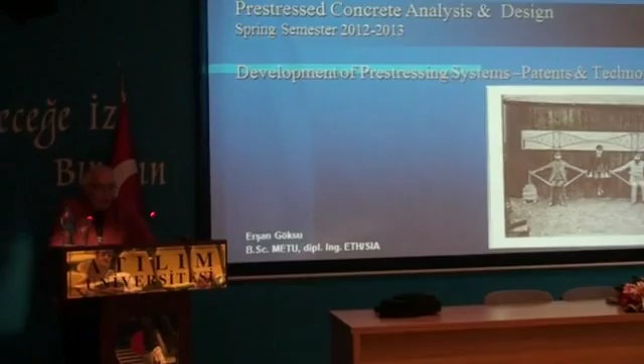The name of the seminar or colloquium is Prestressed Concrete Analysis and Design, and I'm going to specially deepen into the development of prestressing system, patents and technology. That's an introductory discussion on the development of prestressing system patents and respective technology. This presentation is proposed for at least senior year students at the Department of Civil Engineering of Atılım University, as well as for master's students. This colloquium aims to give a brief idea of prestressing technology, materials used, and necessary devices and equipment with their design and development, as I told you before. Presentation of this technology, marketing of this technology to the engineering market, is another aspect - how we are going to sell it. We produce something, but we have to sell it.

I started my course with Ararat Mount in Turkey, in Eastern Anatolia. As a young engineer, an old engineer told me there are no very difficult problems - all problems could be solved just by climbing a mountain step by step. That's a small mountain, not one of the highest in Europe like the Matterhorn. We are going to climb to the top of the Matterhorn, or to the Ararat, and after a while we shall see what's going on.

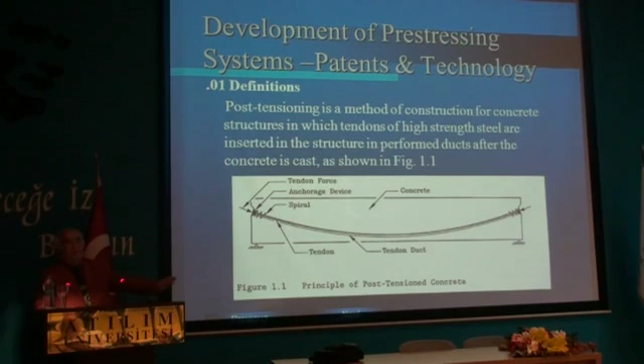In concrete courses or prestressed concrete courses, you already know all these things about it. I'm not going to tell too much - I suppose that you are aware of this technology.

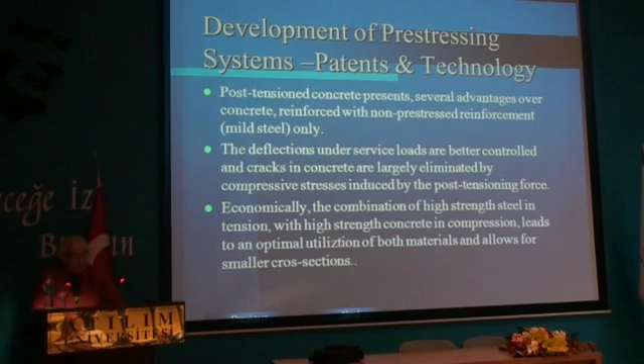Post-tension concrete presents several advantages over concrete reinforced with non-prestressed reinforcement, mild steel only. Deflections under service loads are better controlled, and cracks in concrete are largely eliminated by compressive stress induced by the post-tensioning force. Economically, the combination of high-strength steel in tension with high-strength concrete in compression leads to an optimal utilization of both materials and allows for smaller cross-sections.

As I told you, in order to climb a mountain, in order to develop our technology, our devices, our anchor plate, we are going to start very slowly, step by step, to climb the mountain.

I'm going to tell a very short history of the post-tensioning system. Post-tension concrete is based on the principles developed in the late 1920s and early 1930s by the French engineer Eugène Freysinet for prestressed or pre-tension concrete.

Post-tension concrete was first used in the late 1930s for the construction of bridges in Europe. Eugène Freysinet built the first large prestressed bridge in South America, the Galion Bridge near Rio de Janeiro. Precast beams of 37.5 meters in length were installed in the 14 spans of this structure. Certainly a 37.5 meter span, and precast pretension beams today are still our everyday project.

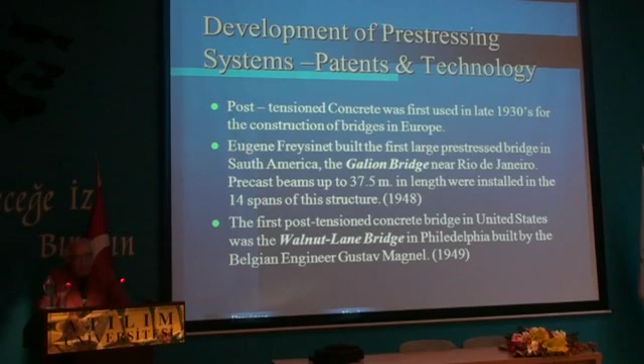The first post-tension concrete bridge in the United States was the Walnut Lane Bridge in Philadelphia, built by the Belgian engineer Gustav Magnel.

In order to solve the problems, we are supposed to go sometimes through glacier difficulties. We have to see the joints in the glacier, and we are supposed to spring above the glacier, and we are supposed to go our way firmly and slowly.

In earlier times we had stones. The Romans developed arch bridges and arch structures utilizing this construction material. We also use bricks - after the Romans, especially the Byzantines, were the founders of the utilization of bricks. If you go to a historical site and see stones, you can immediately tell that's a Roman or Greek structure. If you start to see bricks, you can tell that's somewhat Byzantine.

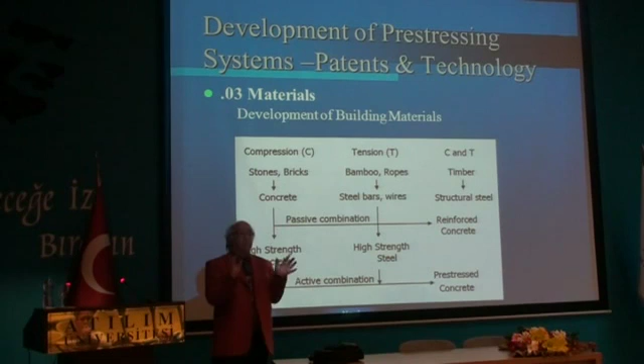Then, on the other side, for the tensional structural members, we were using bamboos - they were using them. We still have some experience with bamboo as a tensional part. They use ropes, then steel bars, surely in classical reinforced concrete systems, and wires - especially wires, the pre-stressing wires.

If we combine concrete and some bamboo or steel bars, that will be a passive combination - after the structure has developed, they are not active. How can they become active? We utilize high-strength concrete with high-strength steel. That gives us an active combination of both members, so-called pre-stressing.

Through passive combination, as I told you before, we have reinforced concrete, and by active combination of concrete and steel, we achieve prestressed concrete.

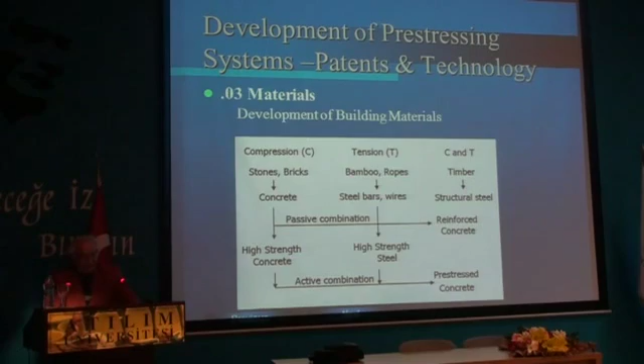Now, I'm going to take the material, especially concrete, and tell you some words about concrete. The universal rule of reinforced concrete is valid as well for prestressed concrete. High tensile strength steel should be utilized with concrete with high compressive strength. The necessity of high compressive strength in concrete in prestressed concrete technology is apparent.

It means the compressive stresses behind the anchor plates, especially its domain of work, determines the compressive strength of the concrete. The loss due to creep and shrinkage is another reason for utilizing concrete with high compressive strength.

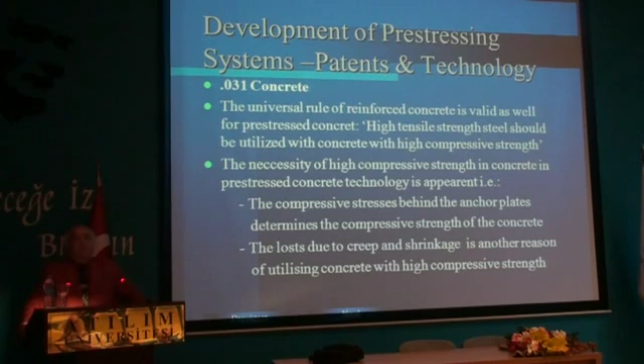The development of prestressing concrete in the early 19th, 20th centuries was very, very slow because of the material qualities. We didn't achieve high quality tendons, high quality steels. We couldn't achieve high quality concrete.

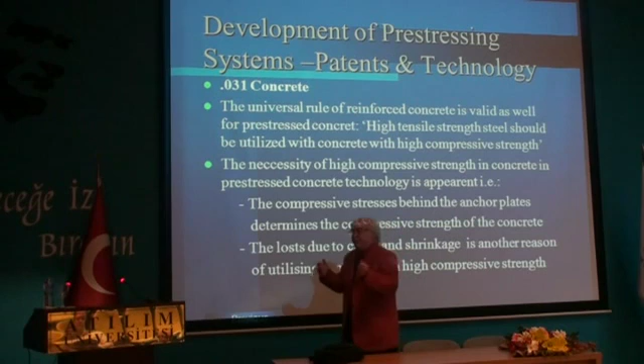What happens after making prestressing, because of the low quality steel and low quality concrete, we had some losses. These losses were preventing us from using prestressed concrete as a structural material. After mechanical and metallurgical engineers developed high tensile steels, we were able to build prestressed concrete, so that we could use prestressed concrete in all structural parts.

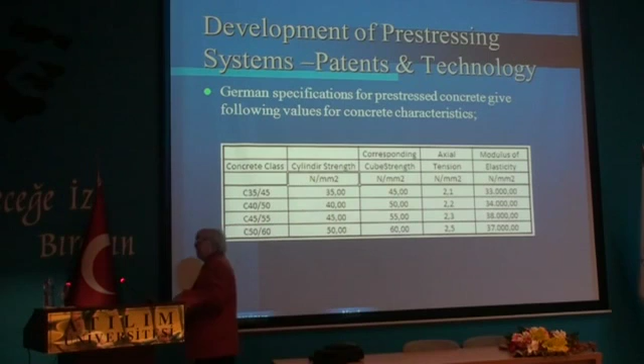The German specification for prestressed concrete gives the following values for concrete characteristics. You could find these tables all over the world. At least I would like to say that concrete has to have good quality because of shrinkage and creep, because of the losses, and prestressed wires or tendons should have as well a high strength.

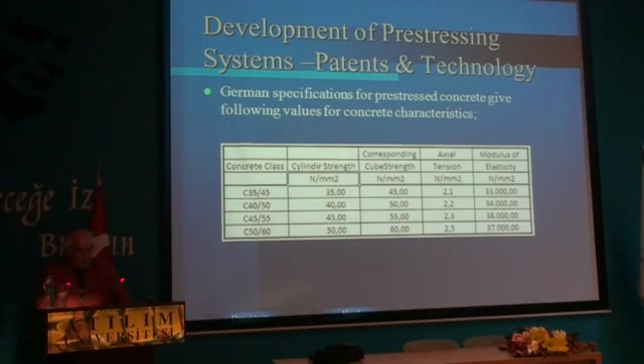It is very difficult to manufacture a prestressed concrete structure with concrete strength quality of 250 kilograms per square centimeter, or 25 Newton per square millimeter. It is not possible. We are going to use concrete of compressive strength of 35 Newton per square millimeter minimum.

Prestressing steel: the ultimate strength of steel wires, strands or bars varies with their manufacturer, so it's frequently necessary to obtain sample tests for each lot of product. However, the general range of values is listed in the table below.

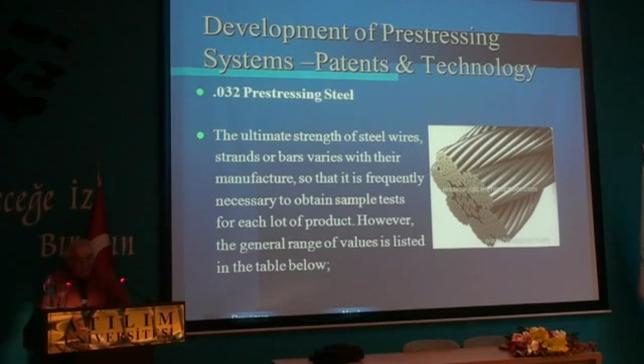That's a very important paragraph. Prestressing tendons or bars, it seems it is not difficult to produce, but to produce a homogeneous and good quality bar is not always possible.

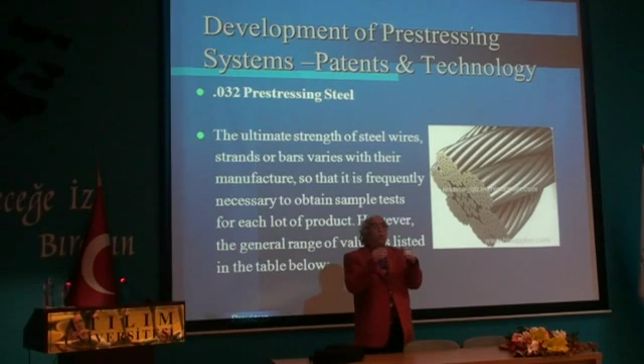That's why these bars should be tested, each bar should be tested, and they have to be certified by the Fédération Internationale de la Précontrainte, FIP, so that you could use the prestressing bars in your structures. If one of the bars has a defect at some small point, then it cracks and disturbs all the prestressing technology, all the prestressing calculations, and so on.

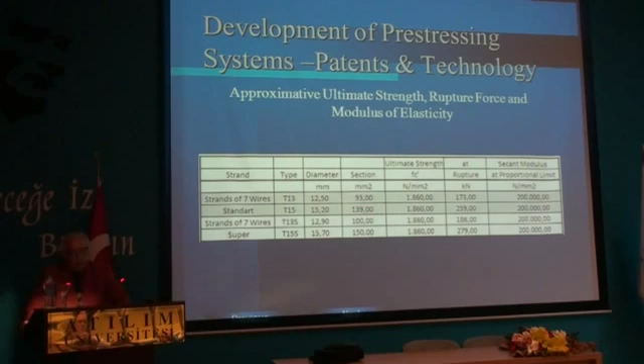Now, in this table, I'm going to give two tables: strands of 7 wires, standard wires, and strands of 7 wires super bars, which have an ultimate strength of about 1,860 Newton per square millimeter. This table you can find anywhere in booklets or on the internet.

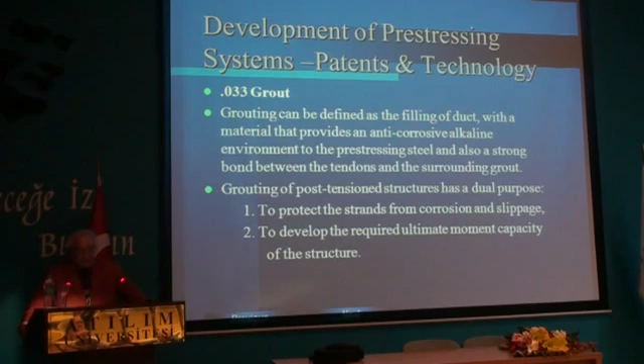Grouting can be defined as the filling of duct with a material that provides an anti-corrosive alkaline environment to the pre-stressing steel, and also a strong bond between the tendons and the surrounding grout. Grouting of post-tension structures has double purposes: to protect the strand from corrosion and slippage, and to develop the required ultimate moment capacity of the structure.

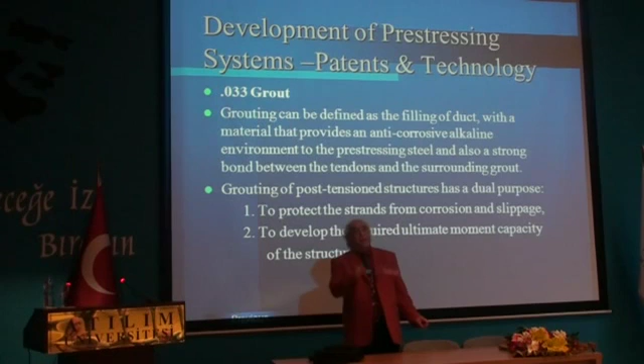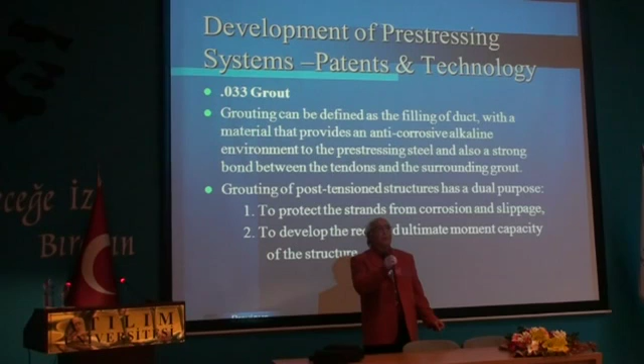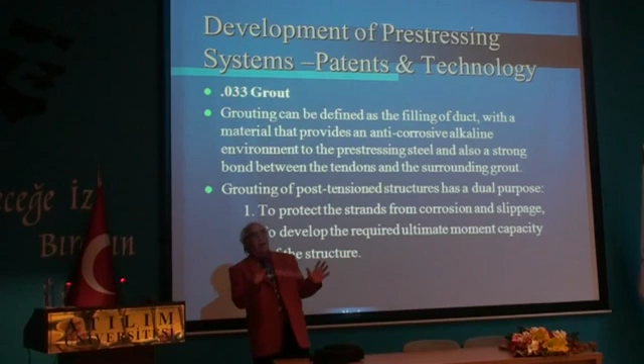Certainly, corrosion is one of the very important phenomena, not only in pre-stressed concrete, but also in reinforced concrete. We have the cover in order to keep the bars in reinforced concrete from corrosion. Corrosion is one of the biggest dangers of reinforced concrete, as we know. We have the same problem in pre-stressed concrete - we have to keep the bars without corrosion.

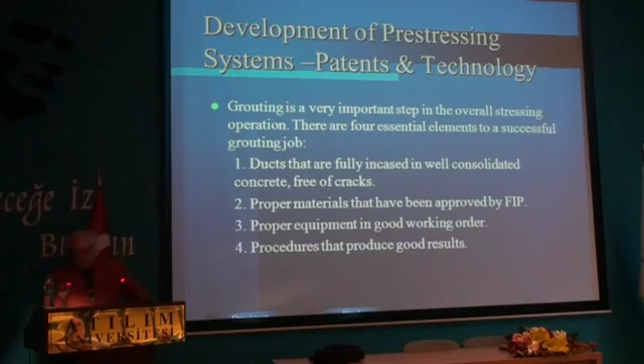Grouting is a very important step in the overall stressing operation. There are 4 essential elements to a successful grouting job: ducts that are fully encased in well-consolidated concrete, free of cracks; proper materials that have been approved by FIP, Fédération Internationale de la Précontrainte; proper equipment in good working order; and procedures that produce good results. These are the 4 essential elements of a successful grouting job.

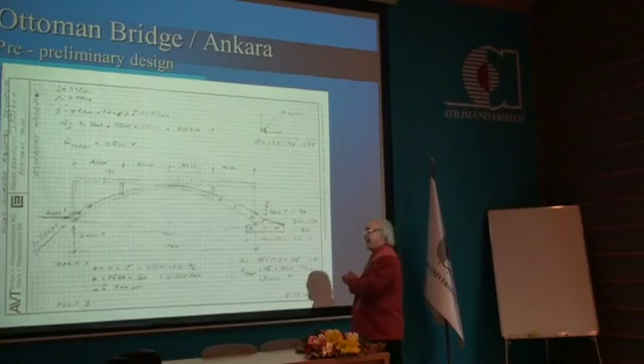Well, as you start to climb the mountain, you start to build a bridge or your structure with small drawings. That's the first very preliminary design - I called it Ottoman Bridge, one of the arch bridges we have built not far from Ankara, on the way to the airport. Now it is built. This shows the first beginning preliminary design and calculations about the techniques, about the abutments, about the spans.

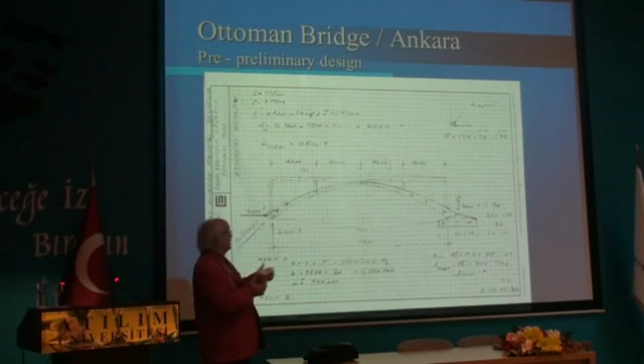This page shows the first drawings I did at that time, and then this project was developed. They did the definitive so-called structural studies, the application works and shop drawings, and today the bridge is in service.

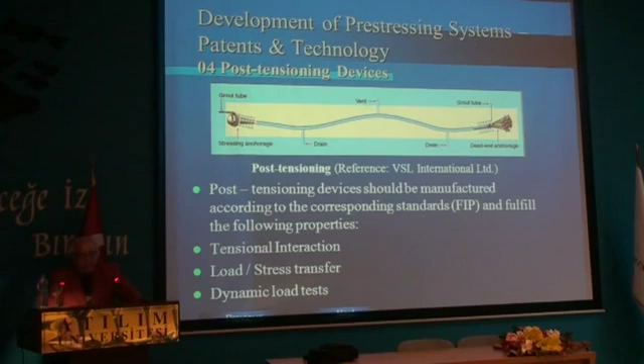Post-tensioning devices, as I showed you before in figure 1.1, we have very schematically those members. Post-tensioning devices should be manufactured according to the corresponding standards of FIP and fulfill the following properties: tensional interaction, load, stress transfer, and dynamic load tests.

As a material, we have principally three things: we need a casting bed, we need a duct, and we need a mold or formwork. The duct sheaths keep the pre-stressing cables from corrosion and allow us to stretch the tendons and then fill it by grouting material.

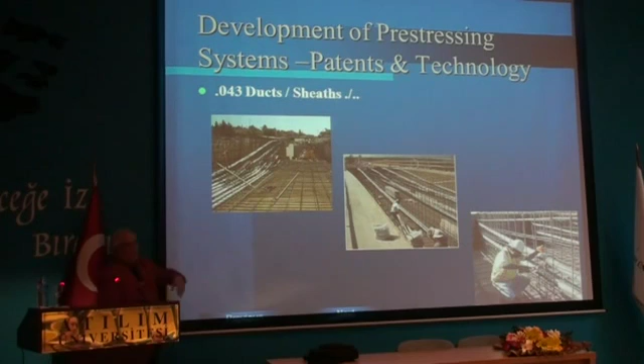Well, we are still on Mount Ararat. We didn't still arrive, just we are at 1,500 meters above sea level, and we have to plan. We are supposed to plan how we shall climb these mountains.

Anchorages - anchorages are one of the most important parts of pre-stressed concrete. The tension is applied to the tendons located in the duct. After hardening of the concrete, the pre-compression is transmitted from steel to concrete by the anchorage device at the end blocks. Anchorages are steel ductile post-tensioning devices transferring the pre-stressing force to the hardened concrete.

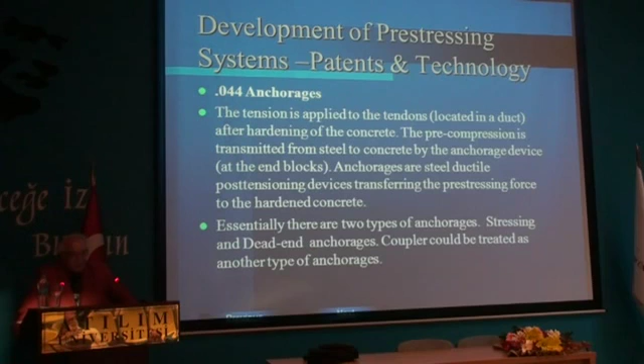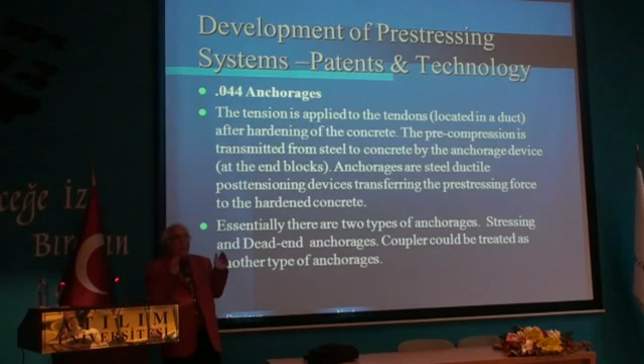Essentially, there are two types of anchorages: stressing and dead-end anchorages. Couplers could be treated as another type of anchorage. I'm emphasizing this parameter of anchorages, since the anchorages are the patent of the pre-stressing. There are, I don't know, 10, 12 or 15 patents in the world - different types of anchorage systems, and they are all certified by the Fédération Internationale de la Précontrainte.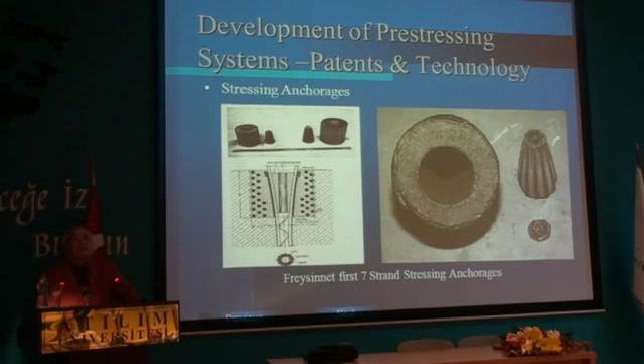Very primarily, Freyssinet has done his anchorage part with high strength concrete blocks. They are the first stressing anchorages of Freyssinet. They are not steel, they are concrete, high strength concrete.

A very modern developed anchorage head, as it is seen here, developed by Freyssinet, is something like this. We have here, as you see, the sheath, a trumpet, a strand, the wedges, and the anchor head. Surely they are not so simple as you design or draw.

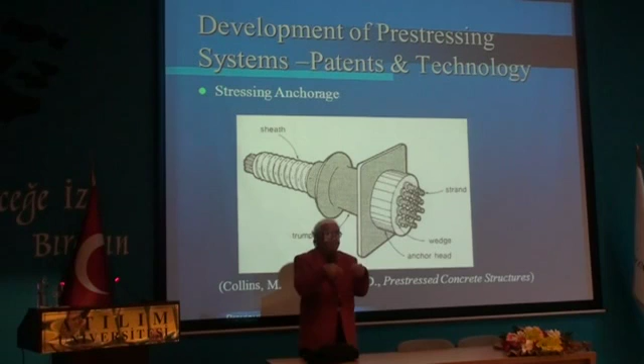You are supposed to calculate the thickness of the sheath, the diameter of the sheath, and calculate the trumpet. If you don't have the trumpet, what are you going to put there instead, against the splitting forces? You are supposed to put some spirals, the anchor head, and so-called wedges and strand.

One of the important things is the anchor head, since the anchor head distributes all the pressing forces onto the concrete itself.

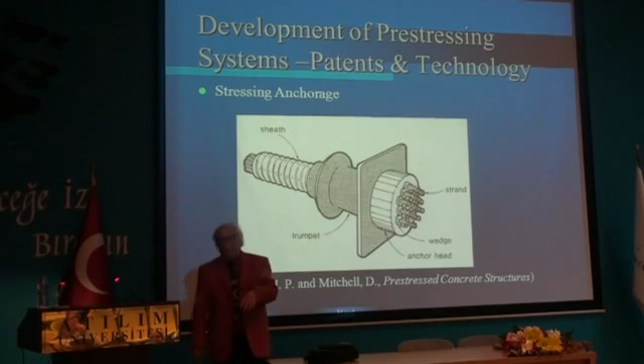Well, we are no more on the stony way, we are just in the snow and glacier. We are developing, step by step, going to the top.

A very mathematical explanation of a stressing anchorage. As I have shown you, all these dimensions are supposed to be calculated by engineers - not only civil engineers, but with the help and coordination of mechanical engineers and metallurgical engineers. They are supposed to give us the good combination of material qualities.

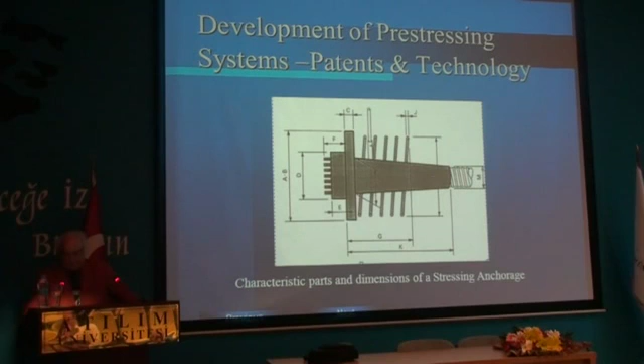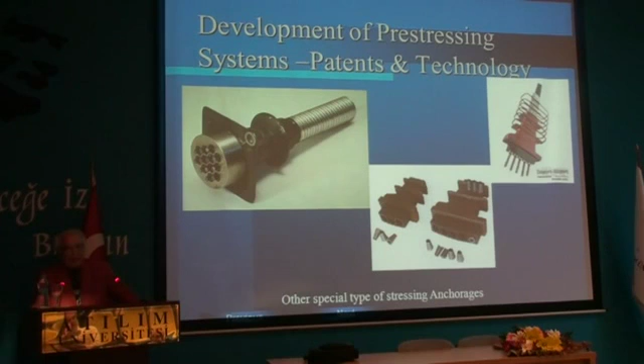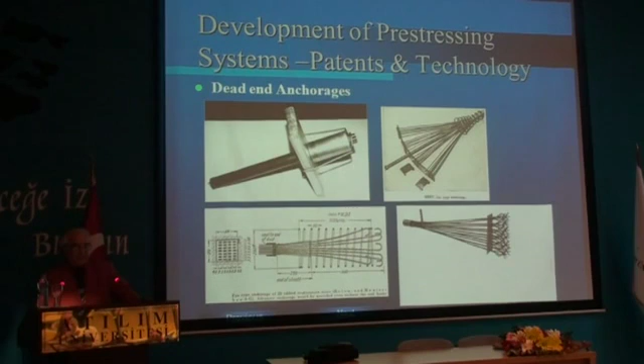There are some other special types of stressing anchorages for flat slabs, for buildings, and for bridges as well. There are some dead end anchorage photos here, from right to left: very, very primitive, very basic at the beginning, and just left and top, a modern dead end anchorage.

Oh God, we are not far away from the summit, we are not far away from the top. This development of the technology, development of the prestressing system, development of the patent needs teamwork, especially, as I show you, in climbing.

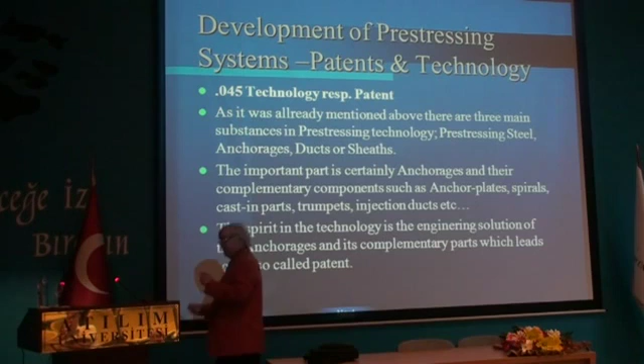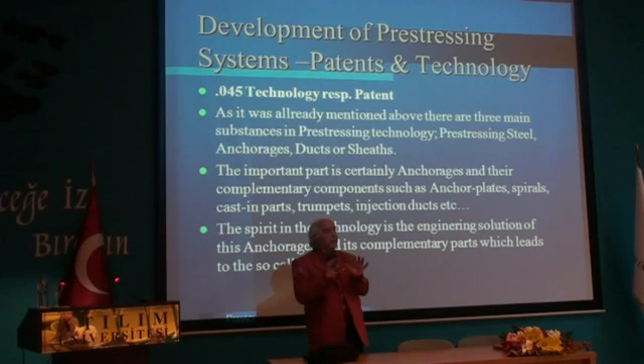FIP was founded by the prestressing devices producers. They have their own standards, not only for material quality but also for details and specifications. Parallel to FIP, there are national laboratories, national institutions, and technical universities. They operate under the license of FIP, giving patents, and controlling the development of production and manufacturing.

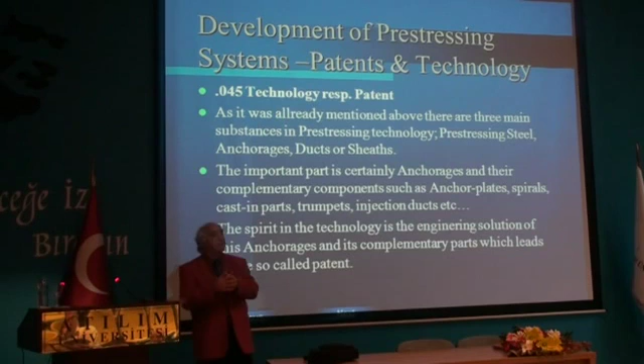What we do in Switzerland to develop a prestressing patent, what we are supposed to do - I'm going to come to that soon. It gives you more information. Thank you.

As already mentioned, there are three main substances in prestressing technology - that's an examination question: prestressing steel, anchorages, and ducts or sheaths. It is not a course, there shall be no examination. No, just in my courses sometimes I tell you the important things, pay attention.

That's the examination question. The important part is certainly anchorages and their complementary components such as anchor plates, spirals, cast-in parts, trumpets, injection ducts, etc. They are supposed to be calculated.

They are supposed to be calculated by engineers - mechanical engineers, civil engineers. We are the engineers, we are supposed to develop the things. We are not going to use things that have already been developed. We are supposed to make the research, be the leader, and find some innovative technologies.

The important part is certainly anchorages, as I told you. The spirit of the technology is the engineering solution of the anchorages and its complementary parts, which leads to the so-called patent. I'm emphasizing again - the spirit of the technology is in your hand, is your engineering solution of these anchorages and its complementary parts, which leads to the patent.

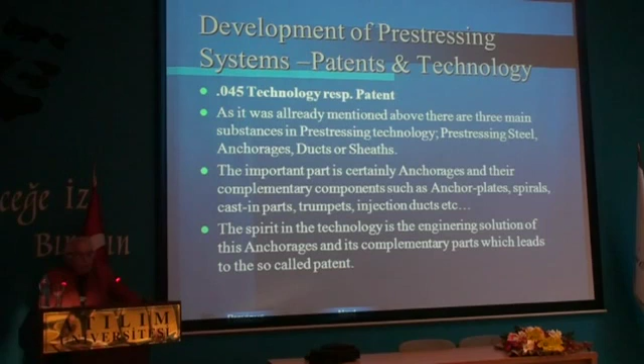The main function of the anchorage is stretching and fixing. The method of stretching the strands, tendons or cables could be by screwing, by hydraulic jacks, by wedges, or by electricity and chemical processes, depending on the development of the patent. Sometimes you give electricity to the tendons, so that through heating it stretches, then you stop the electricity, pour the concrete, and squeeze the concrete.

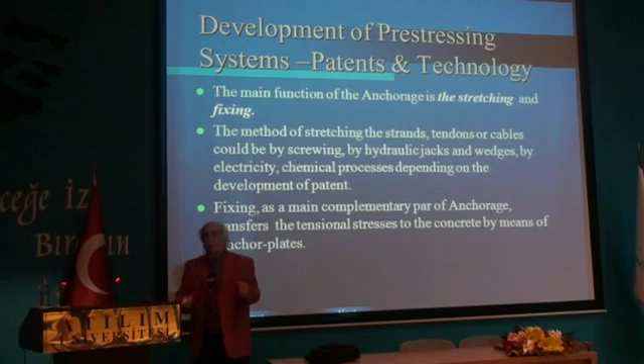Well, if you are engineers, you are going to find other things. Probably you are going to find the trees and bind there and take the tractor and stretch the tendons. Fixing is a main complementary part of anchorages.

Transfer the tensional stress to the concrete by means of anchor plates. We are supposed to fix the anchorages so that all the loads, all the resisting forces, transfer to the concrete.

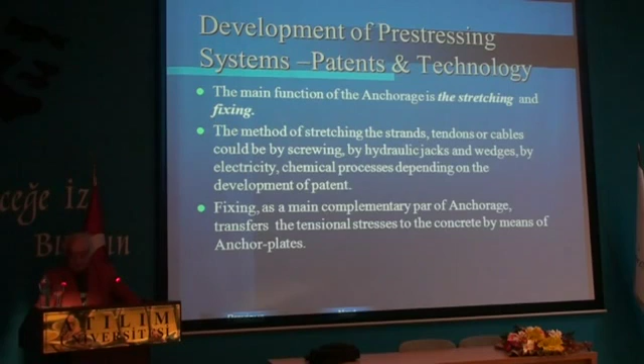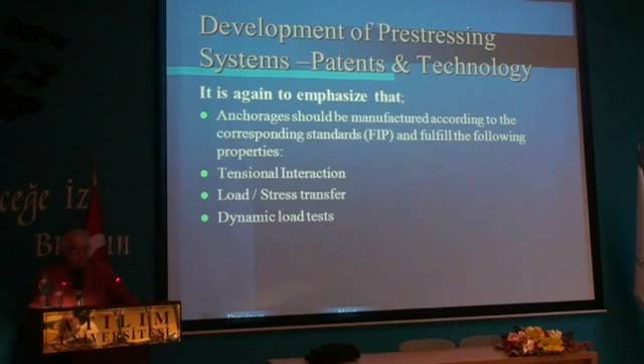It is again to emphasize that anchorages should be manufactured according to the corresponding standards, FIP, and fulfill the following properties: tensional interaction, load, stress transfer, and dynamic load tests. Developing a post-tensioning system needs teamwork between civil and mechanical engineers, metallurgical engineers, technicians, and draftsmen in order to attain success.

The following checklist includes the minimum required information necessary for approval by EMPA, Switzerland. EMPA is Eidgenössische Materialprüfungs und Forschungsanstalt, the Swiss Federal Laboratories for Material Science and Technology, for a new or modified post-tensioning system. If we prepare a post-tensioning system, a patent, we go to EMPA and they give us a patent so that we can use it in construction.

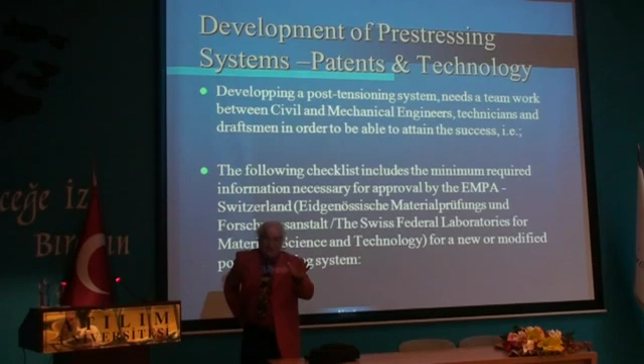They are testing them, they are looking at them, and they do very regular controls. And I'm sorry, somebody's calling me.

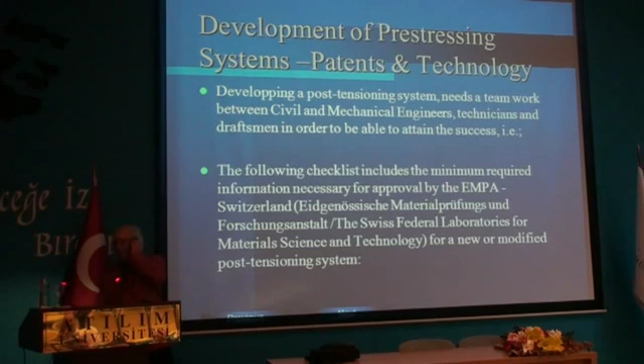Yes, sir, in the process of stretching the strand, what level are we going to stretch, and what will happen if we over-stretch the strand? Well,

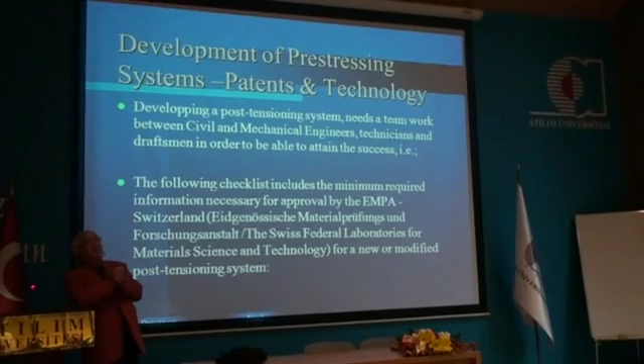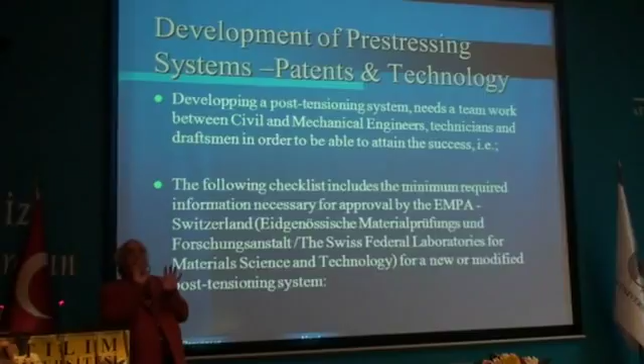As I have shown on the table, the ultimate strength of the bars is 17,000 kilogram per square centimeter. It means 1,700 Newton per square millimeter. We are supposed to stretch them only 0.7 of that. It means instead of 1,700 Newton per square millimeter, we stretch it to 0.7 times the standard value, 0.7 times 1,700 Newton per square millimeter. In our calculations, we take a safety factor again, and we calculate with this stretching limit, reducing it with another 0.7 as well. That means also 0.7 times 0.7 times 1,700.

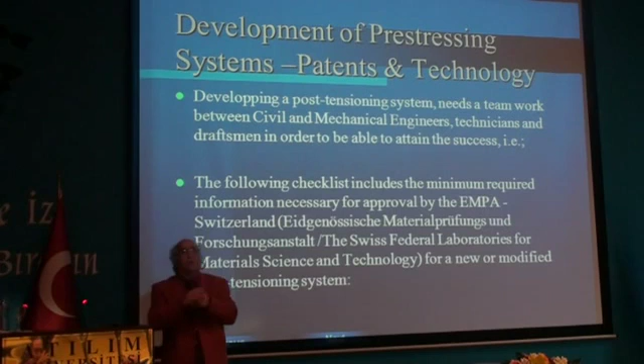So that, well, no problem. But if we exaggerate, if we make stretching more than what is necessary, that causes cracks, and it will be the biggest disaster. This happens even before we stretch to this low level. If there is a defect in the production or manufacturing of the cable, I'm emphasizing it, it is a disaster, a danger for the prestressing system. Okay?

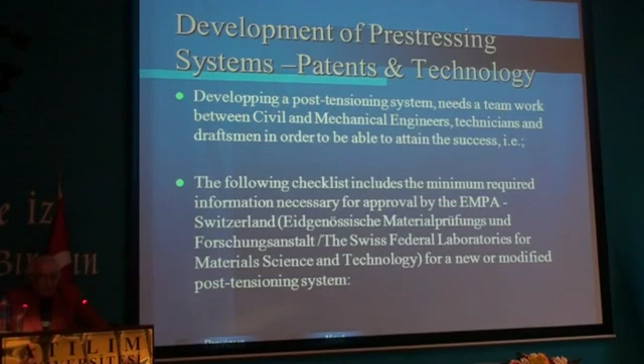Developing a post-tensioning system needs teamwork, as we go up in the mountains or climbing, between civil and mechanical engineers, technicians, metallurgical engineers, technicians and draftsmen in order to attain success. However, the following checklist includes the minimum required information necessary for approval by EMPA, Switzerland, for a new or modified post-tensioning system.

Well, we are more or less on the top. We developed our system. Now we are going to bring it to EMPA, to the officials of EMPA, so that they could say okay, your patent is applicable. We are on the summit now.

All prestressing systems that are proposed for use in Switzerland shall be submitted in the following form to expedite approval of the system or systems. First, description. We have to give a description of what we do, what we did, what we calculated, what we developed.

A current product description, literature of the system or systems being proposed. Prior listing of the system includes specific details of the project where it has been used, or where we are going to use it, in the bridges, in the buildings, or in the towers. Complete record of tests run on the system.

Explain how seating loss is to be controlled and measured. We are supposed to control and give detailed information about the losses. That's a figure to show, a figure from our metallurgical engineers, how they produce pre-stressing tendons or pre-stressing wires, those stresses, manufacturing stress of high tensile strength steel.

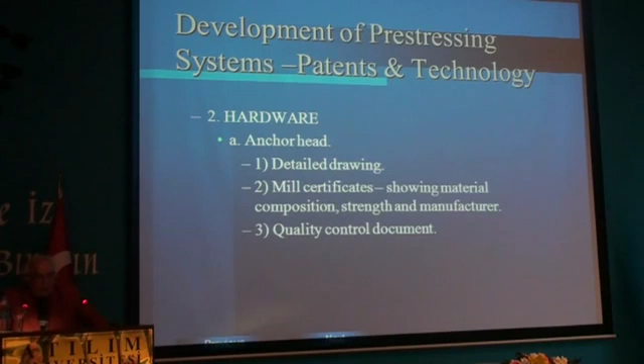And then we are going to present our hardware. We are supposed to give our anchor head detailed drawings, mill certificates from the factory where we have produced, manufactured this part, showing material composition, cadmium, carbon and so on, strength and manufacturer, and quality control documents.

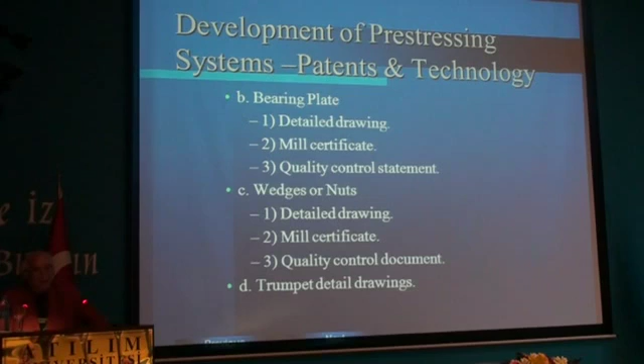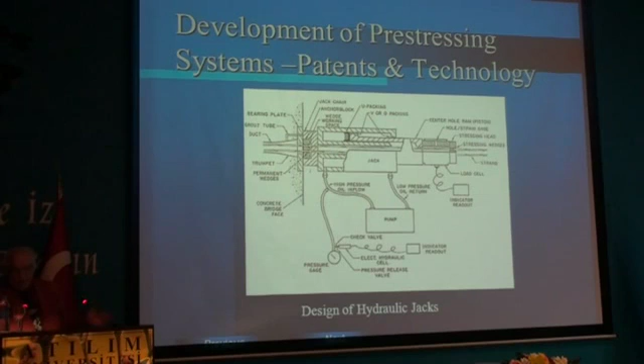Then we come to the calculations. We have to prove the calculations are according to standards and norms. Stress behind bearing plates at service load after losses - that's the duty of civil engineers.

Stress behind bearing plate at 95% specified ultimate tensile strength. Maximum bending stress in bearing plate of 95% specified ultimate tensile strength.

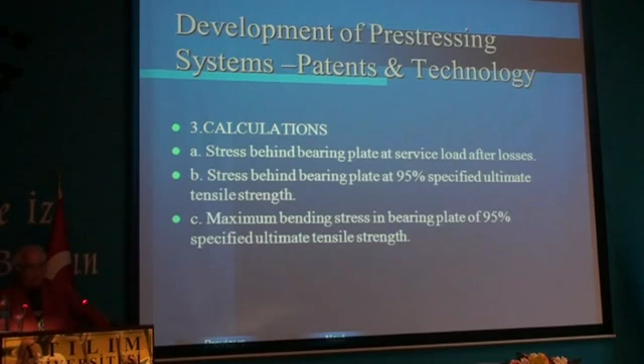We are supposed to give the system detailed drawings of the anchorage system, jacking system, and duct and grouting details. Complete information on grouting procedures and equipment to be used. Description of how system components are protected from physical damage and corrosion. Description of tendon repair or replacement should a failure occur. Description of how qualified technical assistance is provided in the field for the contractor performing the work.

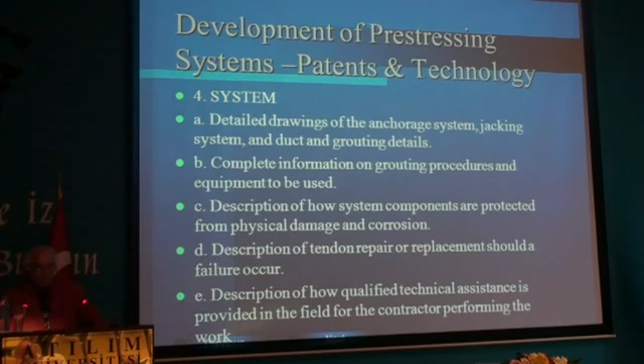We have to keep this in. Now we are on the top. We can start - we got the patent and we have to construct our organization diagram in order to start.

Marketing. We have a group of research and development. The studies - they didn't finish. We have to produce. We have all these anchored parts, and we are supposed to produce them.

That's procuration. A group of procuration, a group of friends, they are supposed to buy the tendons, wires. Where are we going to import the tendons - from Belgium, from Spain, from Italy? Which one is the best as far as quality is concerned? That's the procuration. Or where are we going to buy the anchorage materials?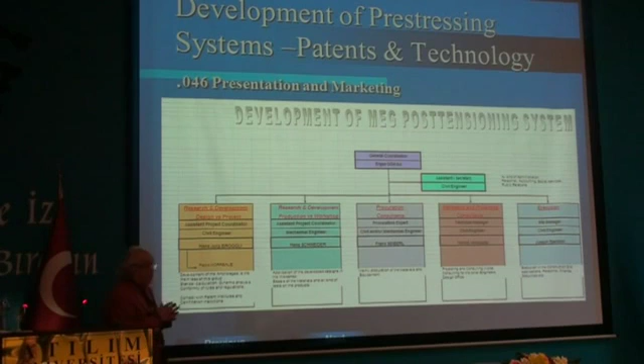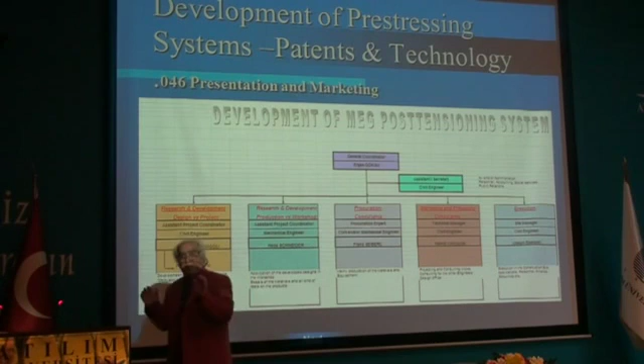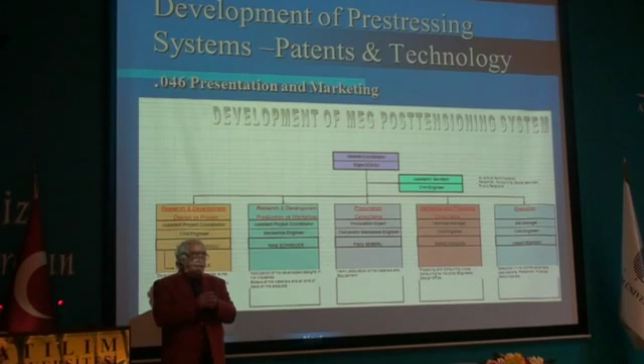explain and give hints for marketing and projecting consultancy. That's good. And then after producing the material, after producing the project, you are supposed to have a group of execution of the prestressing.

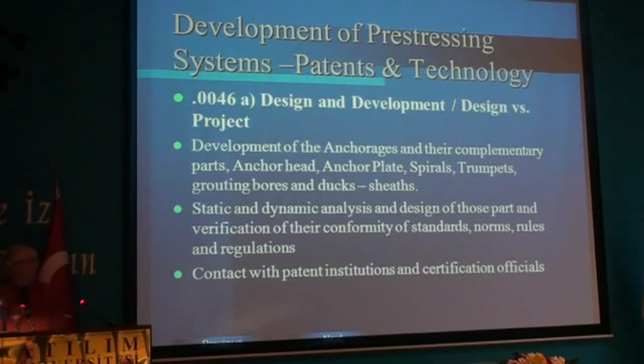Development of the anchorages and their complementary parts - anchor heads, anchor plates, spirals, trumpets, grouting bores, and duct sheaths. That's the design and development, design versus project. Static and dynamic analysis and design of those parts, and verification of their conformity to standards, norms, rules, and regulations. Contact with patent institutions and certification officials - that's the duty of the first group.

Research and development, production versus workshop - application of the developed designs in the workshop. Essais of materials, tests of the materials, and all kinds of tests on the products. Essais - I'm sorry, it's French - it means tests of materials.

And then comes the procuration consultants, mainly procuration of the materials and equipment. All the devices, all parts of the prestressing segments should be manufactured according to the corresponding standards and fulfill the prescribed rules and regulations with the conceivable certificates, patents, and quality tests necessary. Procuration of those devices which are not all day tasks is quite delicate and should not give a chance to failure.

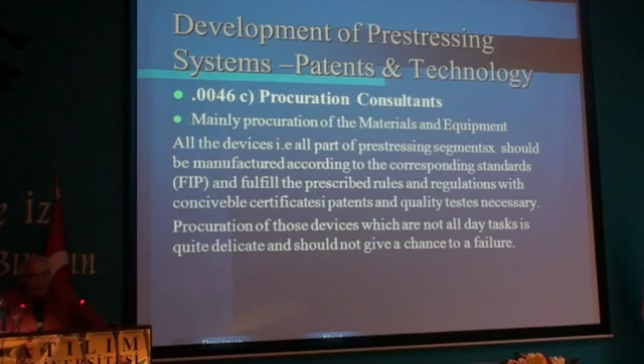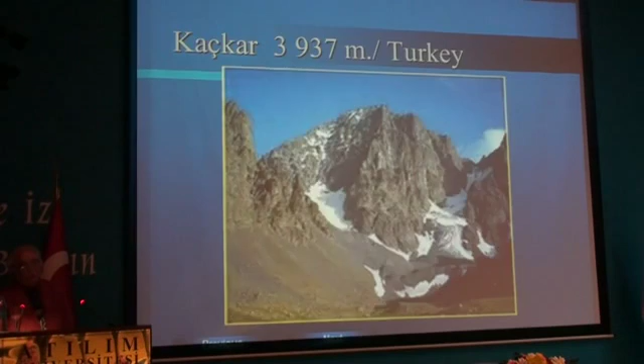Now we open our horizon and we can go even north of Turkey and to the other mountains to develop marketing and projecting. We go to marketing, we go deep in marketing.

Projecting and consulting works - consulting the other engineers and design officers, beginning from the preliminary design, evaluation of bill of quantity, preparation of bidding documents, comparison with other alternatives and presenting the economy of the system, and convincing the client in this technology till the execution plans and details. Structural calculations, stability verifications, detailed studies are in the domain of this mission.

Marketing is as well his principal task, to make the system and technology familiar to state institutions, private investors, architects, and especially engineers and students. Common effort with professional organizations to reach the opinion leaders through courses, seminars, colloquiums, and familiar meetings. Preparation of technical documents, publication, and all kinds of advertisement is covered in this duty range.

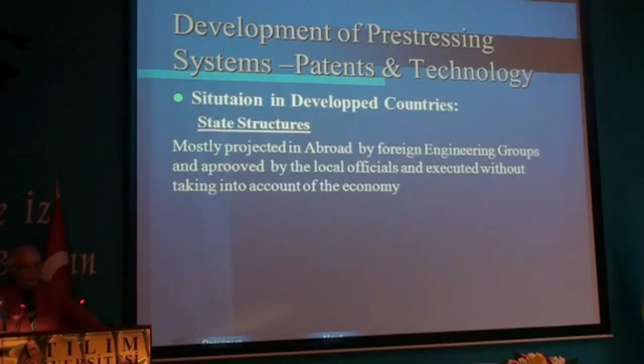Situation in developed countries - in our country, state structures are mostly projected abroad by foreign engineering groups and approved by local officials and executed without taking into account the economy. In the private sector, local engineers do not have the necessary experience to attack the project and propose alternative technologies and solutions. Prestressing technology does not meet only the need for well-qualified materials, but also well-qualified engineers and workmanship.

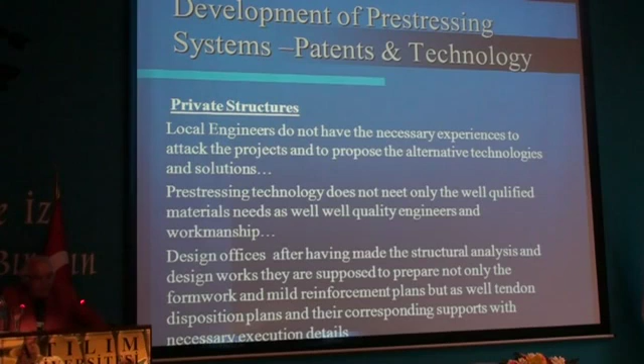Design offices, after having made the structural analysis and design work, are supposed to prepare not only the formwork and mild reinforcement plans, but also tendon disposition plans with their corresponding support and necessary execution details. Engineers, even in Switzerland, don't like to use prestressing concrete.

Why? First, normal reinforced concrete needs only formwork and mild steel plans. But for a prestressing concrete project, you need formwork, mild steel, reinforced prestressed concrete plans, and to carry the reinforced prestressed concrete members, you need additional special plans for the support of the prestressing.

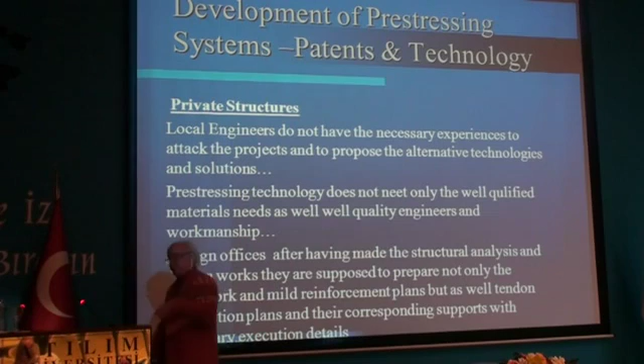Marketing and projecting consultants of the firm have to take corresponding responsibility with the co-partner engineering group and/or architects against the owner and the law. As a result, either local engineers avoid proposing alternative solutions to the owner because of the risk and amount of projecting and planning tasks, or they make the project without support of specialists and design on the very safe side without taking any risk, giving an uneconomical solution.

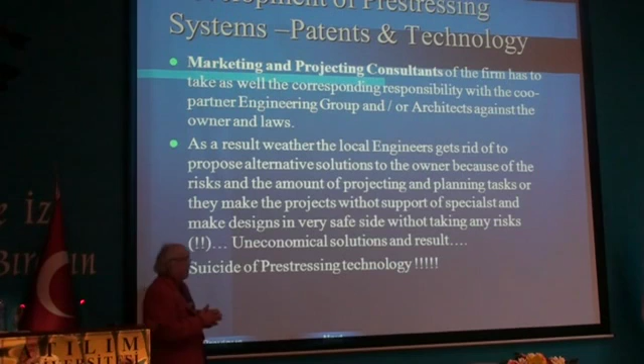That's the suicide of prestressing technology. Some engineers attempt to calculate, but they are still not very confronted with prestressing technology. They project on the very safe side, but that results in an uneconomical outcome.

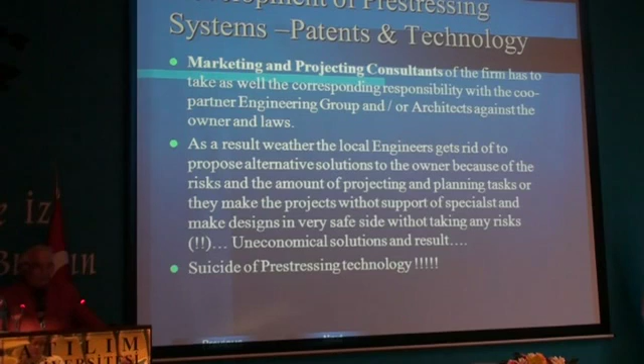Execution is the construction site application: personnel, finance, security, etc. As described above, execution needs well-qualified technicians and workmanship. Certainly we need an assistant secretary, personnel, accounting, and social services in our organization, and the general coordinator has much more things to do.

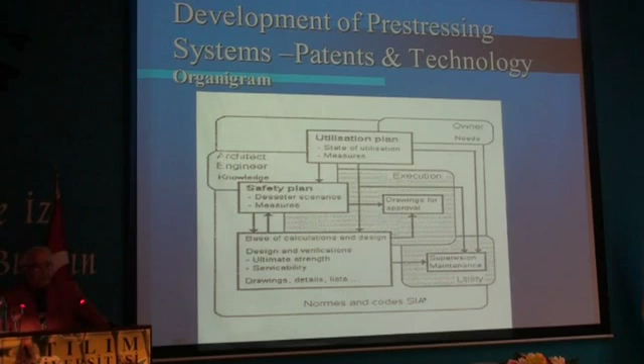Selling the product is one of the main issues of this post. Official investors, owners, contractors, architects, engineers, and finally students in the technical institution are the main objectives of this domain of occupation. That's a small organigram of how the owner, architect, engineer, and contractor work together.